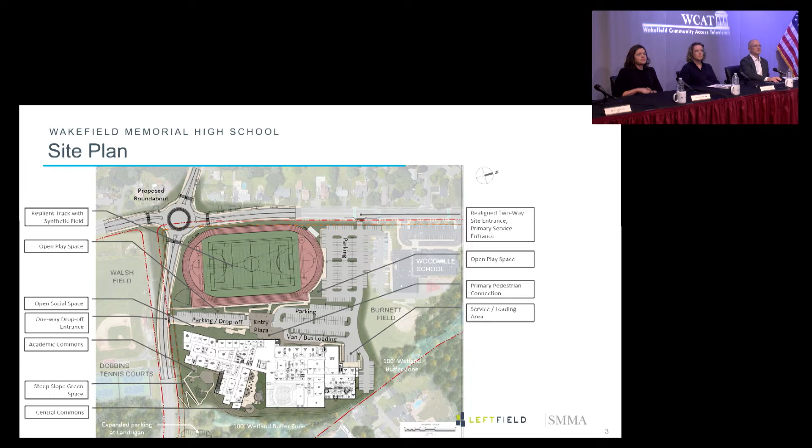Regarding vehicular circulation, the school is accessed both via Hemlock, via a one-way, and also a two-way curb cut on Farm Street. We're providing dedicated parking and van places for arrival and dismissal. Again, the parking lot is concentrated in the north of the site, which was preferred based on our conversations with the district. We are providing, like I said, a new Beasley Oval track and field similar to what you have today, and a lot of other much more exciting spaces other than parking, which Megan is going to talk about tonight.

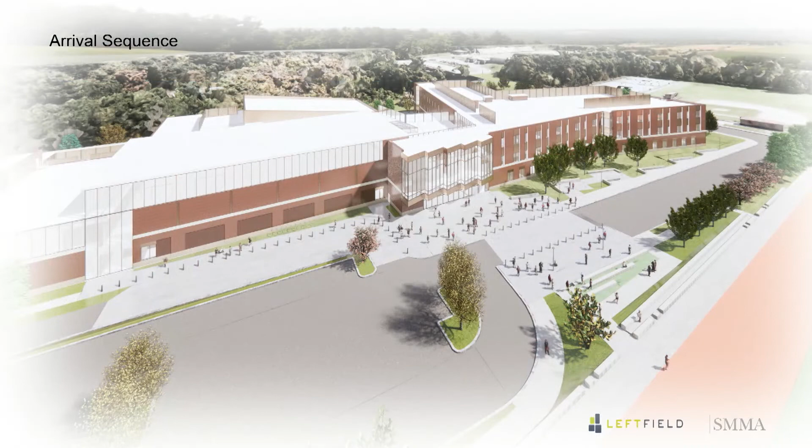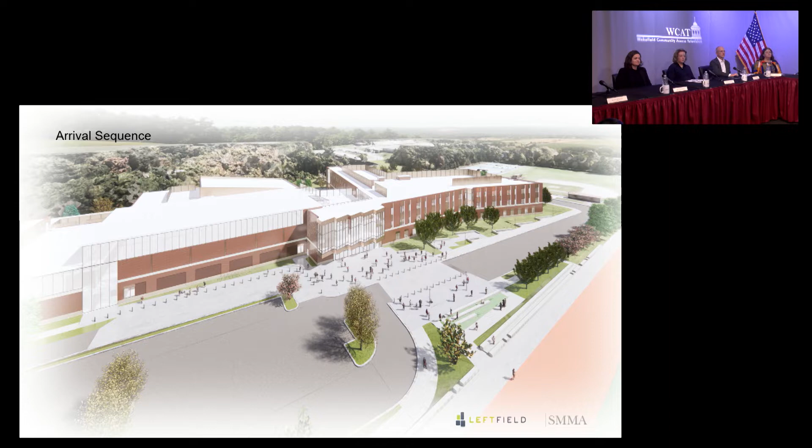Here we're looking at our arrival sequence. We have a one-way driveway entering from Hemlock. Cars and buses would enter here and drop off before and after the plaza. We have a pedestrian plaza that crosses between the school and Beasley Oval, and this will be a raised crossing to really accentuate the pedestrian connection between the school and Beasley Oval. You can see on the left side that we also have a dedicated area for buses and vans to drop off, separate from cars for pickup and delivery.

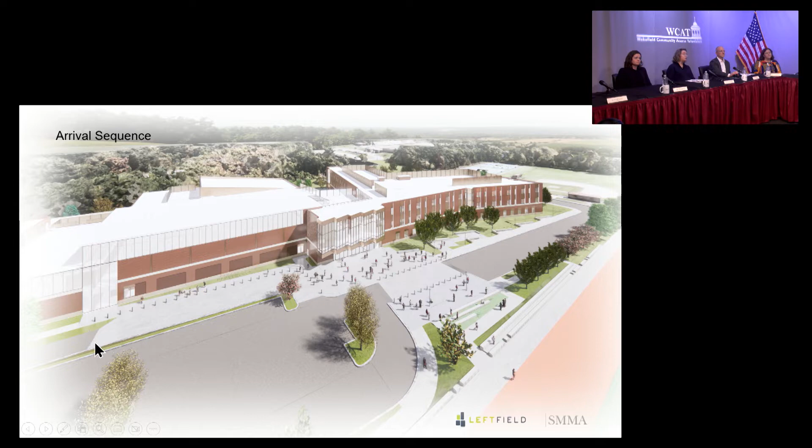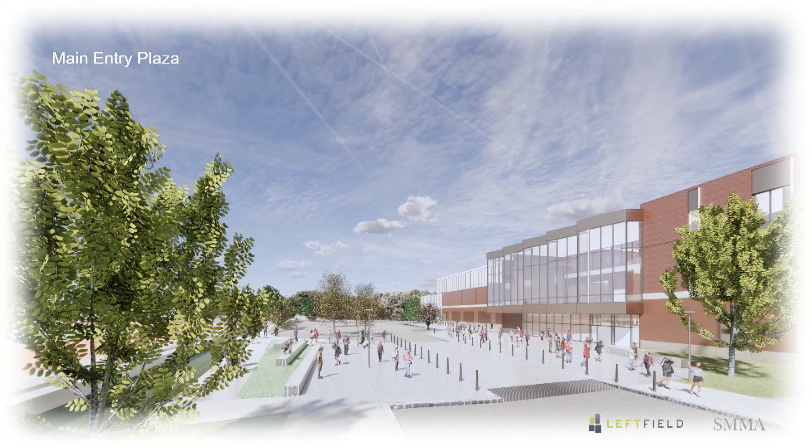Here we're looking at the main pedestrian connection. You can see that it's a raised crossing, with social, academic, and community spaces on both sides of the road. There are spaces with benches that are less formal on the school side, and there is a more formal tiered seating on the Beasley Oval side of the street.

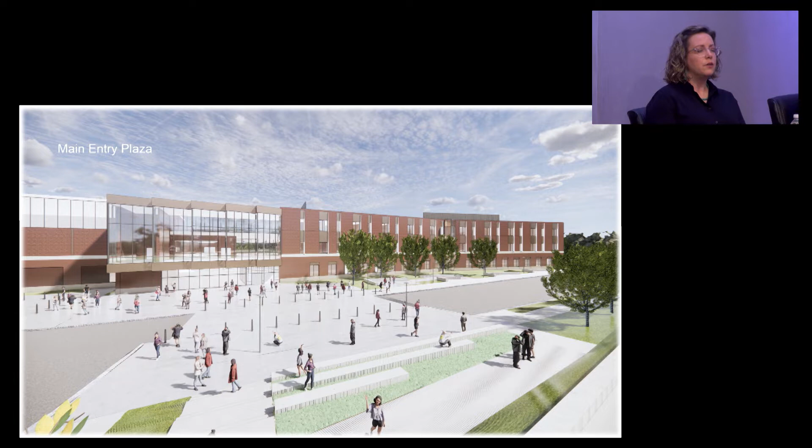You can see here a little bit better the more formal area that can be used for community events or instruction during the school day. On the other side of the driveway, you can see some of the social spaces carved out of the landscape along the entry drive. There's a walkway there that will bring people from Hemlock to the school, and from the school out to the remainder of the campus across Hemlock up to Landrigan and to Dobbins and to the baseball field as well.

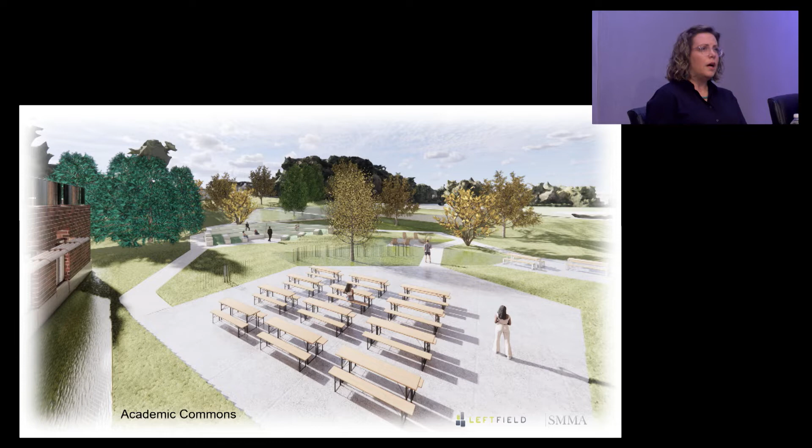This is the Academic Commons, which is located on the south side of the school. You can see that we have several spaces that we'll be creating in this area.

We will be using the grade change to create a much more formal instructional space between a much more open and flexible space in the foreground of the image. These two spaces are the largest, and there are some other smaller spaces that could be used for small group instruction, teacher planning, or other social times while people are on campus to enjoy recreation or go to a football game.

I also want to point out that there is an accessible pathway between this area up to Landrigan, up to Hemlock, and then across to Landrigan. You can sort of see it in the back, but it'll be worked into the grade change so that this becomes a really main pedestrian connection between the two areas.

And then the last image is the Central Commons, which is located just outside of the dining commons. We see this as a much more flexible space that's used for student dining, faculty dining, that could be used for art classrooms or instructional space.

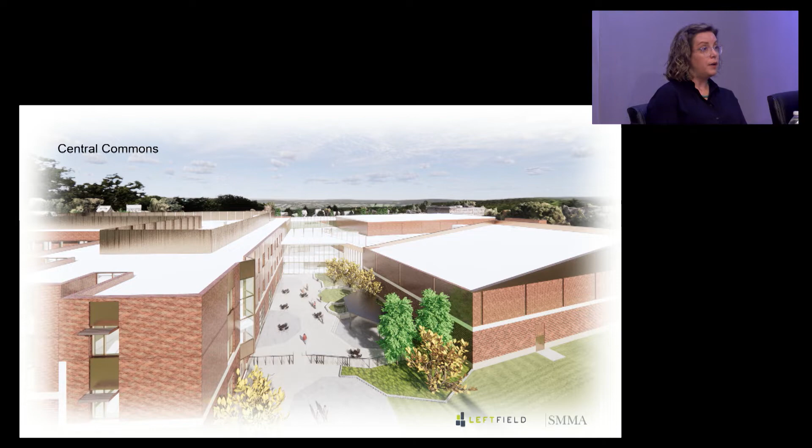There could be pre or post event programming out in this area. We see it as a really flexible space to be used by the community and by the school community as well. And now I'll pass it back to Brian so that he can tell you about the school itself.

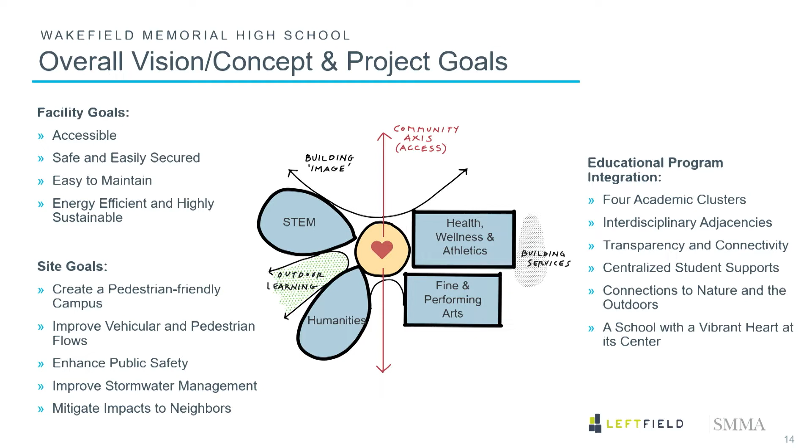I'll talk about the design of the building, not only the exterior architecture, but also a little bit of the interior that we've started. Our team has started investigations of what the interior design of the school will be also. I like to return to this diagram as kind of the touchstone of the project because it encapsulates a lot of what we're trying to achieve.

In a simple arrangement of 4 academic clusters, that comes directly from the educational program, which is a voluminous document that really spells out where the district is going in terms of the delivery of education. And so it's really the piece that we are always testing ourselves against in terms of developing the plan.

Schematic design is a very plan-centric phase. It's one when we pass over to Lynn in a little bit, we'll be hearing about how we're going to establish a budget. There's some cost estimating going on. But really, truly, this phase is about setting the concept for the school that's going to be the threshold to a new sort of opportunity for the district in terms of that delivery.

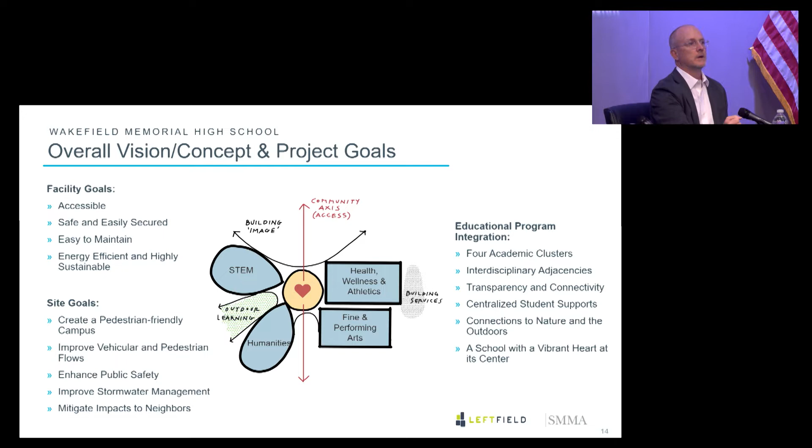So again, the diagram is really something that we think needs to be strong from the beginning. This came out of the visioning process with the community, with a lot of stakeholders. And so, I hope that the essence of that diagram comes through as we start to look at the plan.

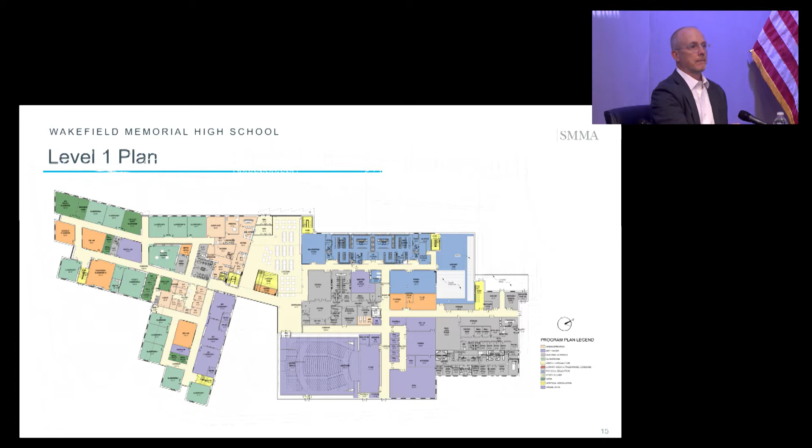This is a building on 3 levels. It's 260,000 square feet, give or take a few. So it's quite a large school. The length of it from left to right is roughly equal to the current school. And what we heard from the very beginning was...

A fundamental issue of the way the existing high school was built was not sort of purpose-built. It's got a large courtyard in the middle. It has add-ons on the end, so the gym is on one end, the theater's on the other, and classrooms are not placed really where you would want them.

So we started at the very beginning to structure the school such that the academics, which you see in the sort of L-shaped figure on the left, are on the southern half of the school, north. The arrow here pointing sort of up to the right. And that is where a majority of the sort of academic life of the school will take place.

So when we heard about the zigzagging or difficulty getting from point A to point B, we feel that what we've given here is really a structure that can help really organize the school day, and it can make it quite efficient in terms of sharing of resources. And fundamentally, it needs to be easy to navigate. So those are some of the guiding principles here.

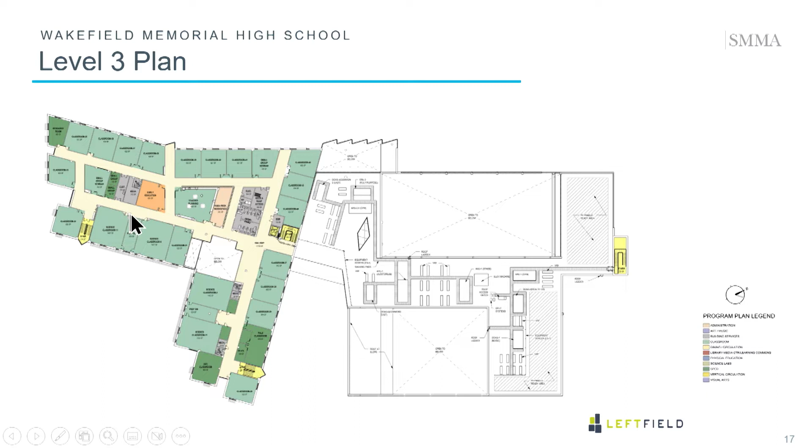We've made efforts to open up the ends of corridors and try to get a lot of light coming in at the edges, so that we really illuminate the center of the building, because it is quite a dense arrangement of space.

As we move to looking at how the building is forming in 3 dimensions, here's a view from the northwest looking over Farm Street. Hemlock Road is coming down on the right here, and the new intersection is off the page to the right.

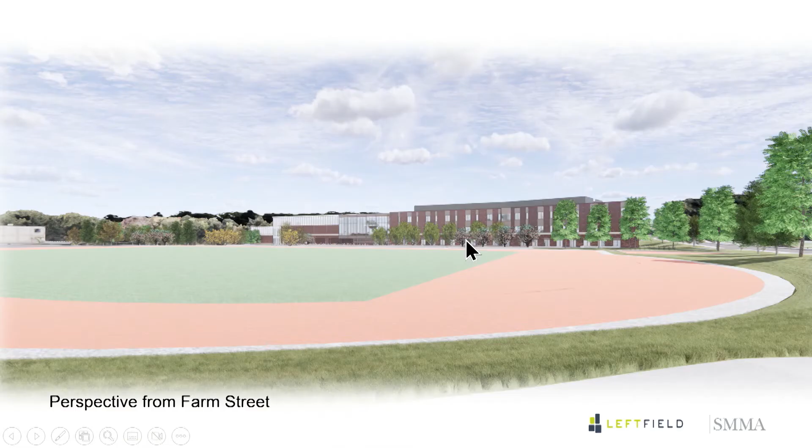So that's the basic massing. We've been asked what that looks like from across the field on Farm Street. We're building on the current Beasley Oval. The oval in the foreground is being constructed after the building, in place of the existing school, after that gets demolished. The field is down about 4 feet from where we're standing, and the front of the building is down another 4 feet.

So we thought it was important to have the building feel like it's connected to the ground. There's a linear element, a sort of watercourse band that expresses the ground floor a little bit separately from the upper floors, but it gives a sense of weight and grounding to the building. We can see the media center even from this far distance.

A closer up view of the school is where we see the materiality. It's primarily a brick masonry building that we've imagined and are having cost estimates reflective of these materials. There are some metal panel accents, and again that banding in a precast concrete material, which probably won't be as contrasted to the brick but should be visible and legible.

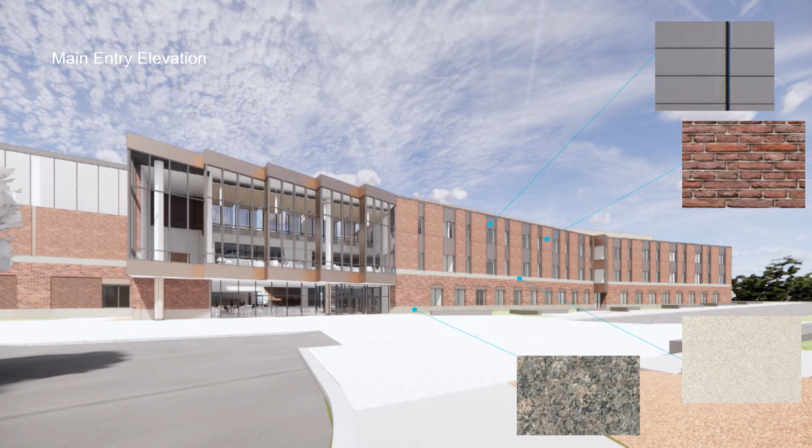And then at the base, granite for its durability - very long-lasting. It's one material we don't have to worry about its durability, and it's fairly affordable relative to alternatives.

More detail at the front of the building. Again we're expressing here the end of a corridor with a projection out, trying to create some break of the planarity and flatness of what the wall could potentially be.

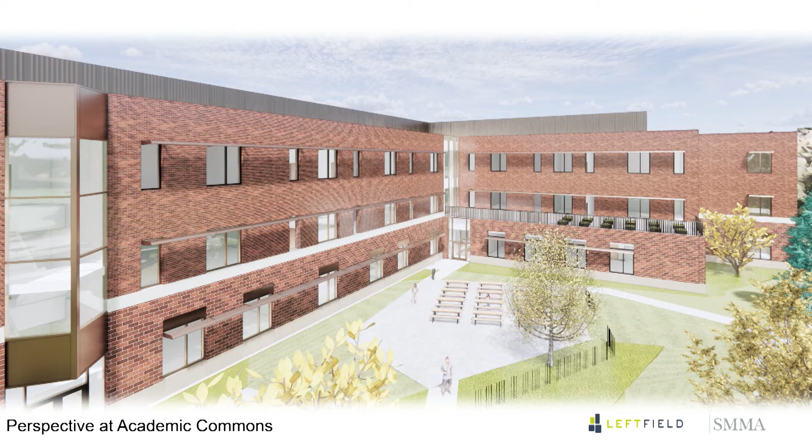On the rear side of the building, which is more south-facing, there's a more horizontal expression, which has some awning elements - kind of louvered awnings that create shade on the glazing elements. You can see the shadow and how that can be really effective at keeping direct sunlight off the glass.

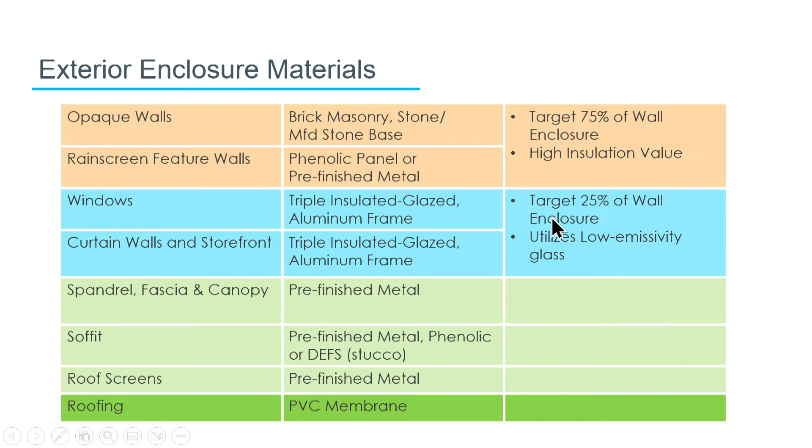For the materials, we're going for a 25% window-to-wall ratio, which is in line with our building performance targets in terms of achieving a net zero ready facility. This encompasses other elements, but also the window elements are going to be triple glazed, and the solid elements will be backed up with a quite robust insulated wall - super insulation, you could even call it.

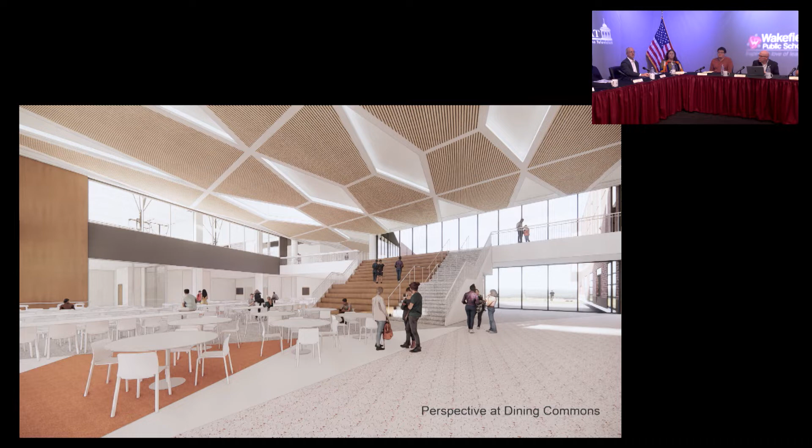A few images of the interior, the main dining common space. These are very much in progress and being reviewed this week with the exterior and interior focus group, so we'll get feedback on these this week.

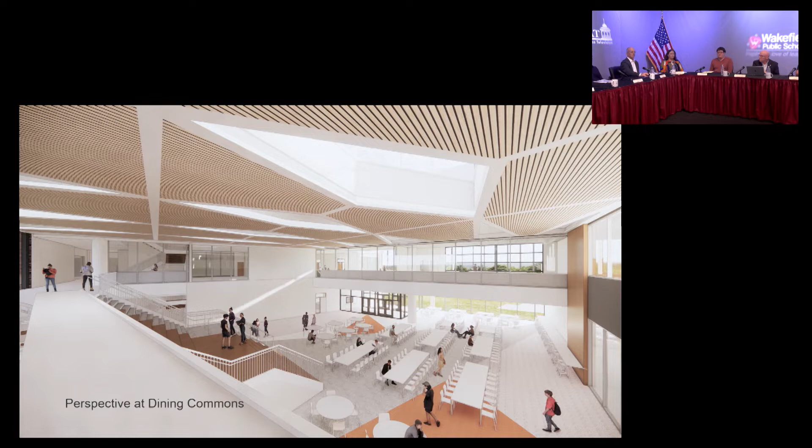We like the direction of animating the ceiling with some kind of openings, whether there's natural light coming in or artificial, as sort of a coffer. We think this can enliven the space, but we also want a sense of calm here because of all the activity - we don't want to overburden it with too much going on visually.

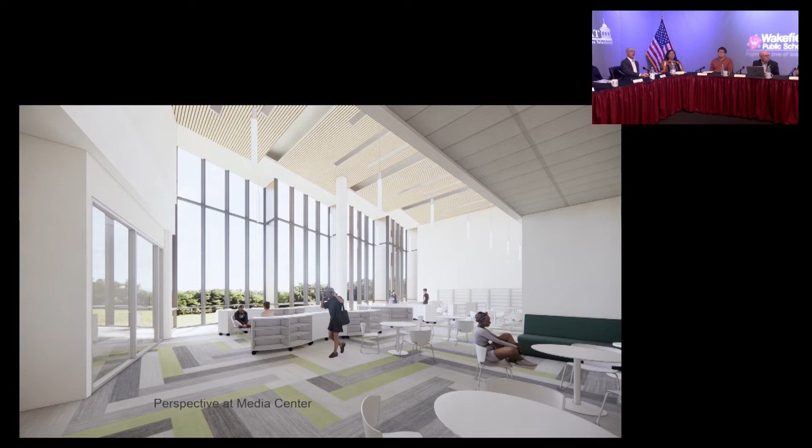The media center is one of the few spaces that will have carpet. There's a floating ceiling that relates to the exterior gesture out the front of the school, which is what you're seeing straight ahead. There are, again, a multitude of different seating opportunities and differentiation of environments for different types of learners.

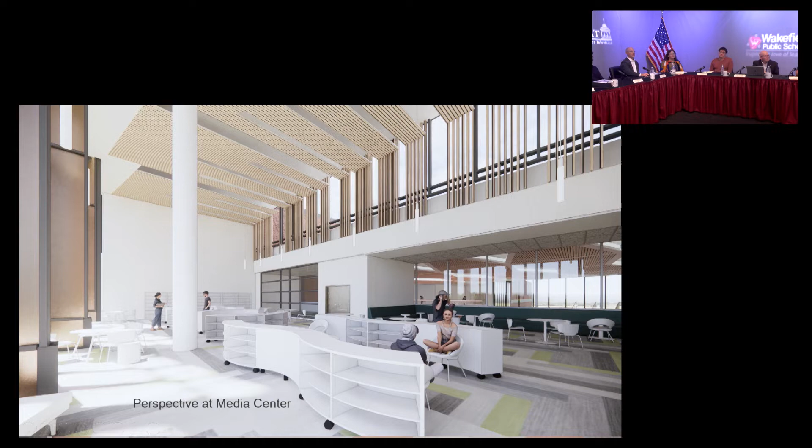A view looking back, and on the right you can see the view into the dining common space. We've got multiple elements here - my sense is this will calm down a little in terms of the overall expression, but we really want to try to imagine the best space possible.

Though the bulk of the material palette is fairly commonplace for a school, we will look for a terrazzo floor in the main dining common space. Most of the rest of the flooring is going to be linoleum, and most of the walls are painted gypboard. We will have acoustic lay-in tile ceilings, maybe some wood millwork elements, and we'll reserve the colorful elements for painted surfaces that can potentially be modified in the future. Otherwise, it's a fairly neutral palette and long wearing.

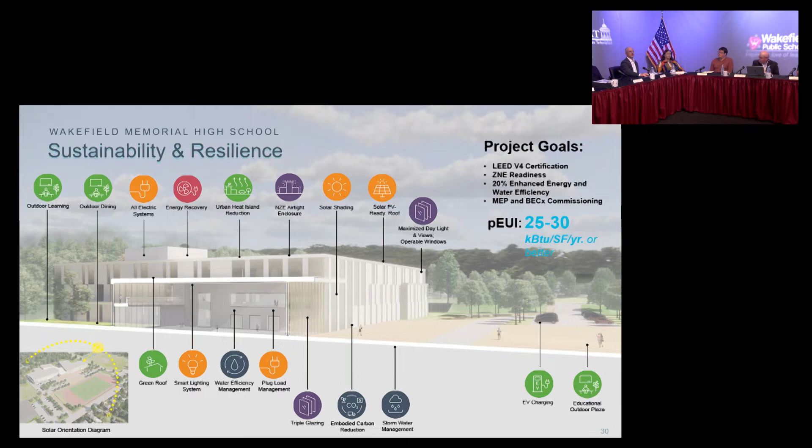We do have high goals for sustainability: zero net energy ready, which relies on a contribution from rooftop solar, and we've coordinated closely with the utility on the idea of the energy park. We'll have a super insulated envelope, all-electric mechanical systems, and high efficiency, and many other features. We covered sustainability in detail in the last meeting, so I'll leave it there, and this slide will be distributed. With that, I'll hand it over to you, Lynn.

Okay, I know there's been a lot of discussion about reimbursement and also what eligible costs are. As Brian said earlier, we are in the process of estimating what you've seen here tonight. We hope to wrap up soon. We have 3 estimators working on the project, and we hope to get estimates in by the end of the day on Friday. We have a reconciliation process with the 3 estimators and all of the teams you see here, engineers and architects, looking at the estimates and trying to come to reconciled costs that we can put together into a total project budget and present to the town for approval.

Our base rate with MSBA is 49.94%. We anticipate getting incentive points. We don't have a firm number on the estimate for good maintenance. There's a max of 2%, and right now we're using a conservative number of 1.5%. We should be getting that this week or early next week from MSBA, and we do expect to get the 2% for energy efficiency, being over 20% over the Mass Energy Code. This would bring us up to a reimbursement rate of eligible cost of 53.44%.

Do you want to take this? Sure. So there is a wetland buffer right behind there, and our intention is to avoid the buffer and to keep as much of the vegetation between the property line and our project intact. As a landscape architect, I love plants, love to see mature vegetation, so it is our intent to keep as much as possible.

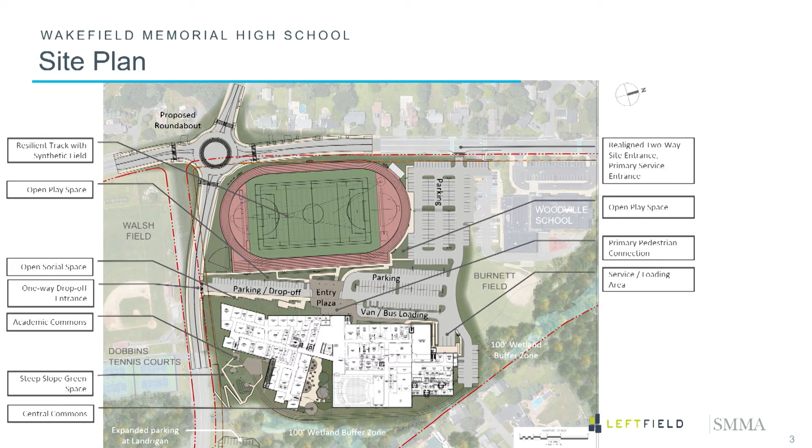Part of what we are charged with on this project is making all places accessible. So we are going to be proposing and building accessible access from the quieter spaces of the school up to Landrigan Field and up to the parking that we're going to be expanding. That will be kind of carved through that landscape as well. Okay, so there'll be some green space. Yes, absolutely — pointing to the area on the map.

And I know the item mentioned that at this point, the expense to the taxpayer would be an additional $1,000 a year on our taxes. Is that still something that looks like will happen? Particularly asking whether or not you've factored into this cost inflation.

Well, that cost was based on the cost estimating that we did back in April. We will be updating that with this next round of estimating, but also if you go to our project website, we do have a calculator, so you can enter the value of your home and it'll tell you exactly what your tax increase would be. Okay, and hopefully once we get the new budget in there, it should be a little clearer and accurate for you for the rest of the project. Okay, great, thank you.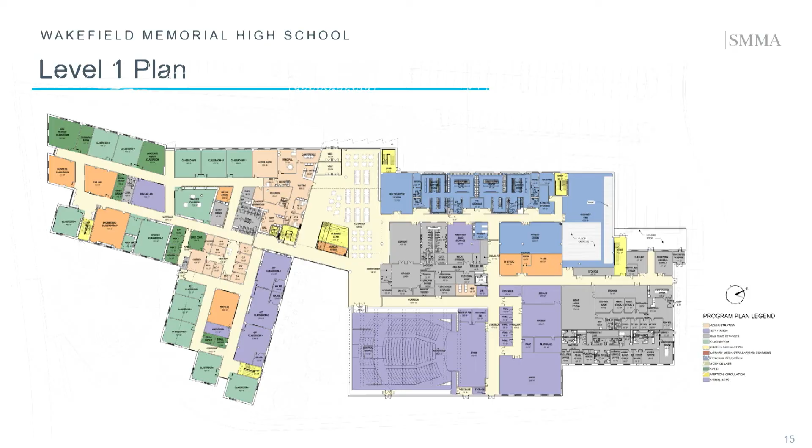Okay, so there's going to be ovens and things to cook food on site. Yes, ovens, grills, you name it. Okay, that's awesome, thank you.

I also had a question - will it all be electric though? Yes, the energy source for the kitchen will also be all electric, along with the rest of the building. This is a big aspect of sustainability, electrification of all the systems, and that's a big hurdle we've crossed with this project.

Okay, yeah, that's great to know, because I also see on the sustainability slide that you're going to have solar panels on the roof. The roof will be ready to receive solar panels, so all the infrastructure will be in place with the construction of the building. There is very likely to be an arrangement with the utility for them to install the panels in the future, and that will be a major source of energy for the school. It will contribute to the energy park that's being envisioned, serving both the high school and the Voc.

And when do you think those panels could be installed? We don't know, it's hard to say.

I have two short questions. Thank you for answering the question about the sound below the gym, that was my question. The next question is, are you planning to have a charging station for electric vehicles on the parking site? Yes, we are. Okay, alright, thank you so much.

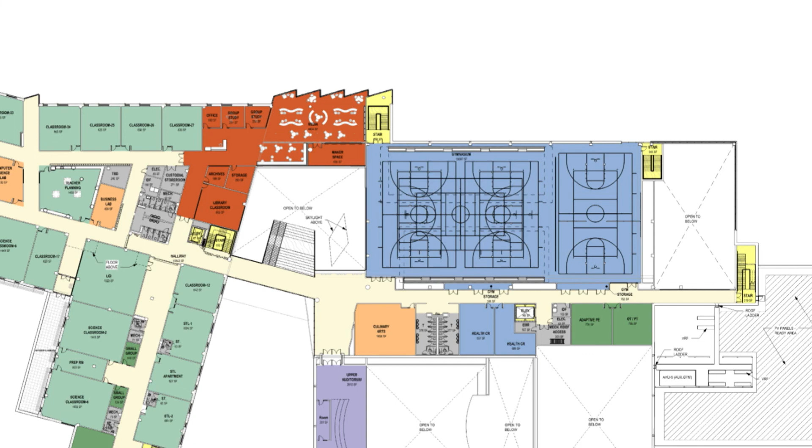The idea of the media center, which is what we tend to call it, is that it truly is home for multiple different media, but also including books. Books are really not going anywhere for a while, but there are other media technologies that would be useful here - multiple computer stations, audio, video, sort of all the media people are consuming generally are here as resources. And there are enclosed group study spaces on the upper portion of the plan to the left - enclosed, but also a little bit glassy, so it feels really open. Those will be perfect for small groups of students to tackle a subject together, brainstorm. There are multiple uses for that space.

There's a maker space that will support the production of presentations and potentially visual support of student projects - fairly low tech. There may be a laser cutter, but more working with paper and crafts within that space. That's a space we've been asked to replicate at the same size as the one currently in the media center library we're migrating from, in the lower right corner of the red space. We're replicating it with windows - something important to note, not a small thing.

I'd also add, something important for the community watching tonight, that this part of our educational plan regarding the library media space was cited by the MSBA. They were in touch with us and asked if they could use this section of our educational plan as an exemplar for other districts constructing a high school. So they've taken what we created as the model we'd like to build, and asked to use it as an exemplar for other districts in this space - it's featured in this module on the MSBA site.

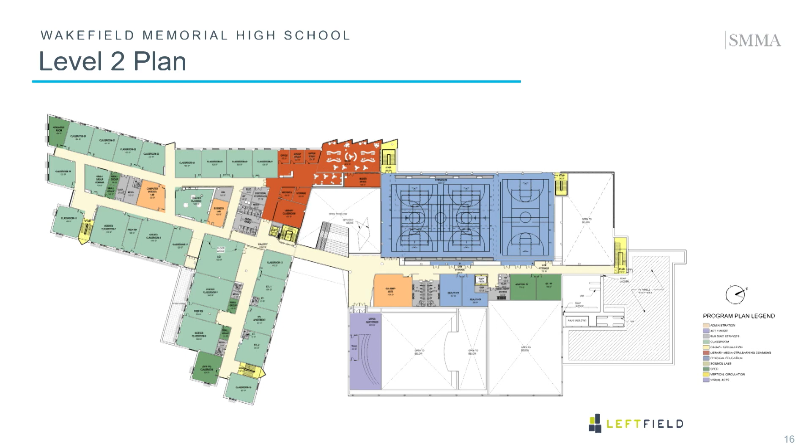Beyond that, we're complying with all of the guidelines which dictate the nature of surfaces, projections from walls, and reach limits. So it will be a thoroughly accessible building throughout the project.

There's one other thing Thomas Butcher answered, and I appreciate this—he gave an answer regarding solar. The Wakefield Municipal Gas and Light Department plans on installing solar panels after the completion of construction and students moving in, estimating in 2028. We got that in writing, so we're going to make sure that they do that.

Joe, I did get one more question. This may end up needing to be for our sustainability expert, but I'll put it to the team: on the sustainability slide, it notes embodied carbon reduction—how are we planning on achieving that goal? The second part was exactly on the solar panels, but the first is related to the carbon reduction piece.

Do we need Martine for this one? I think we'll need Martine to go into the deeper dive on that item. All right, we will get back to you, Robin Greenberg. Thank you.